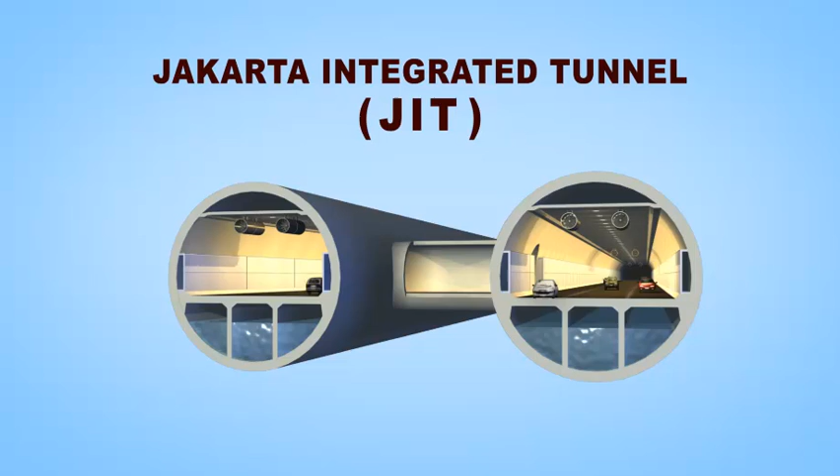Jakarta Integrated Tunnel, a twin or double-barrel tunneling system, presented by PT Antaredja Mulia Jaya and supported by the Ministry of Public Works and Housing in cooperation with the provincial government of DKI Jakarta.

Jakarta is the capital city of the Republic of Indonesia with a population of around 10.2 million people in 2011. But the Jakarta metropolitan area, or Jabotabek, has around 28 million people, which is the biggest in Southeast Asia or the second biggest population in the world.

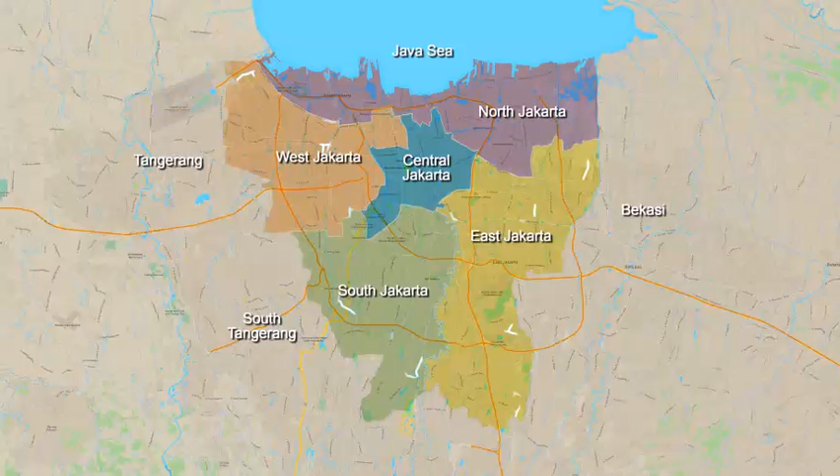Jakarta has only 7,660 kilometers length of roads, covering road areas of around 4,000 hectares. The ratio of roads in Jakarta is only around 6% of the city area. The total amount of motor vehicles in Jakarta was around 9.6 million in August 2014.

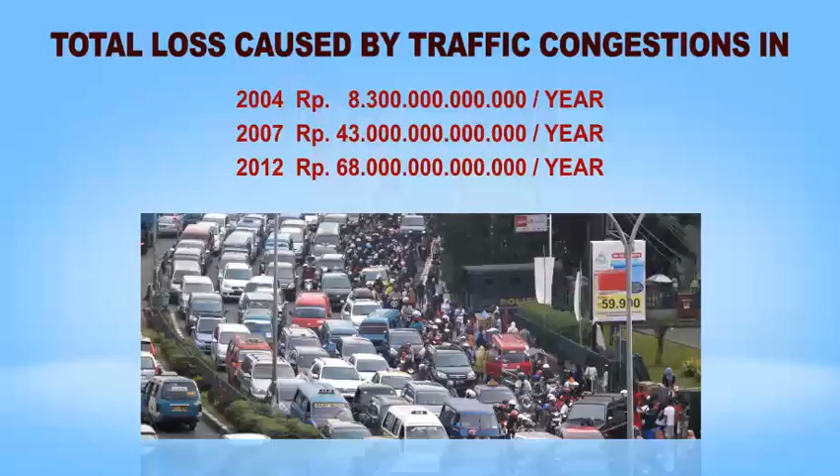These motor vehicles are always increasing rapidly year by year and cause severe traffic congestion in almost the entire city area. The classical problems of Jakarta city are traffic congestion and flooding.

The basic concept of flooding management in Jakarta was given by Professor Herman van Breen in 1918, when Jakarta was called Batavia under the Dutch colony. In this concept, Batavia city was entrenched by a flooding channel. In principle, this concept is to limit or restrict rainfall water coming to the city from the upstream area by building a half-circular flooding channel.

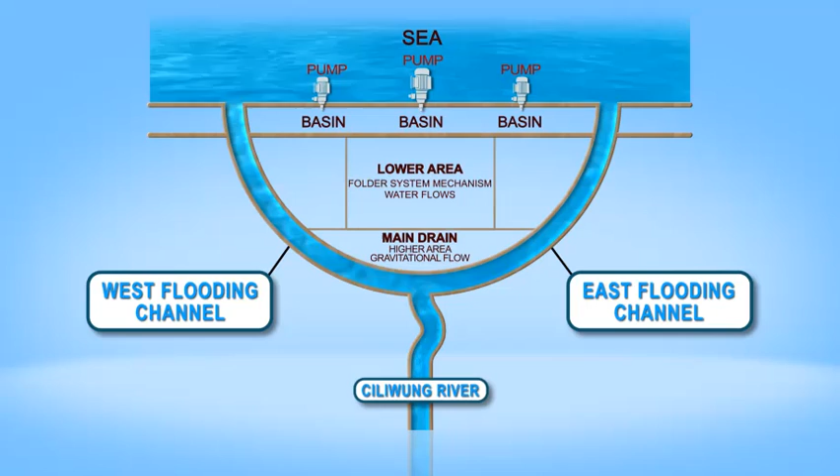Whereas since the volume of rainfall in the city has become less, it can be managed by building several drainage channels inside the city. The Dutch built half of the flooding channel to cover surface water flow from the southwest bound area of the city. This channel is well known as Kanal Banjir Barat, or West Flooding Channel.

Just a few years ago, the provincial government of DKI Jakarta completed this flooding channel by building the other half of the channel in the east direction, that is the East Flooding Channel. However, now a new problem has arisen. The old Batavia has changed and become a bigger city called Jakarta. The flooding channel is not bounding around the city anymore, but is now located in the middle of the city. Therefore, a new model of flooding mitigation is urgently needed at the southbound of this flooding channel.

The best answer to all of those problems is the Jakarta Integrated Tunnel, or JIT. JIT is a solution to traffic congestion and flooding problems, and at the same time, it can give a solution to the lack of electricity and standard clean water supplies of the city as well.

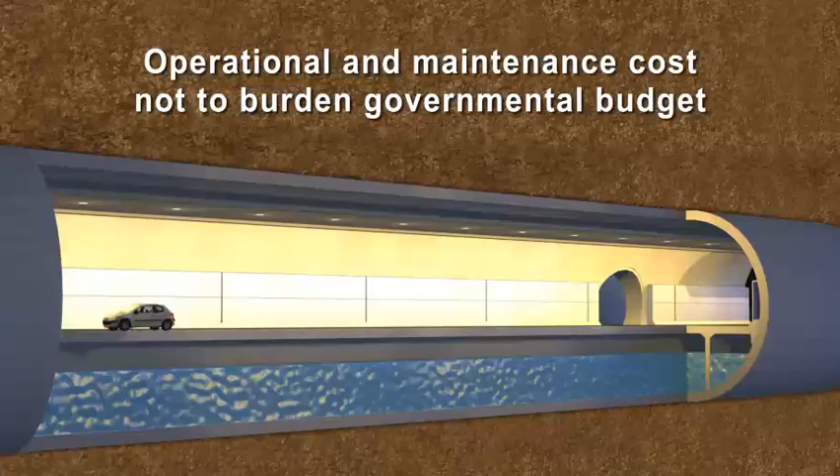Actually, it is an obligation of all governments in the world to build and finance a flood controlling system facility, because not even a single private company will step into such a zero return project. In order to overcome this constraint, in the Jakarta Integrated Tunnel concept the flood controlling system is integrated into a toll road system. So, the JIT system relatively will not burden the government budget, especially in operation and maintenance of the project.

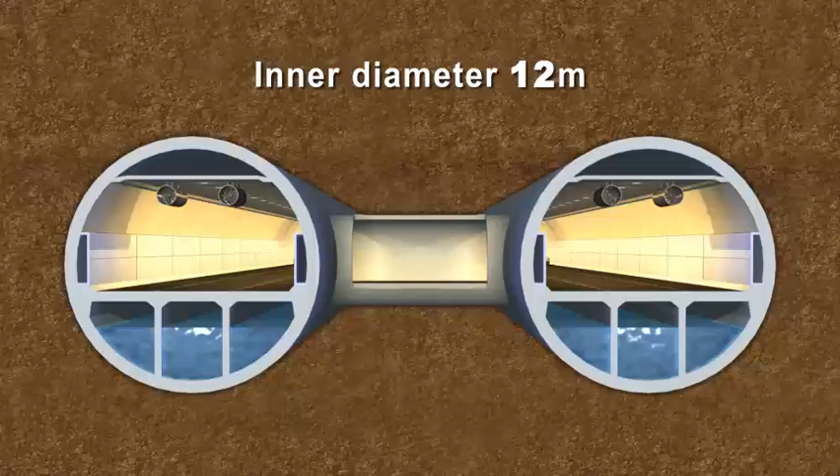The Jakarta Integrated Tunnel System is a twin tunnel or double-barrel system of 12 meters inner diameter each. There are 3 lanes of toll roads in each tunnel. In the JIT system, the functions of flood controlling and toll road are totally separated. There is no need to build a water gate inside the tunnel to separate and alternate these two functions, wet and dry conditions, as needed in the single tunnel system. Therefore, there is no risk of water flooding the toll road at all.

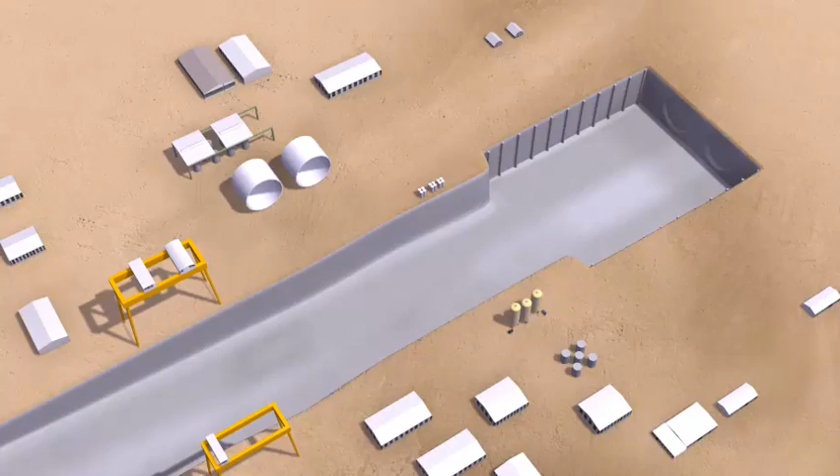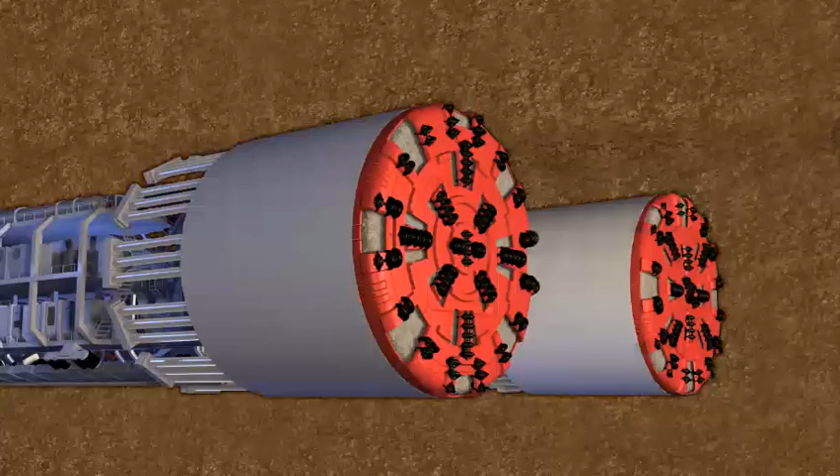Since there is no land acquisition needed, or only limited at both ends of the tunnel, tunnel construction can be done in a very fast and safe way using a tunnel boring machine, or TBM. While the machine is moving ahead, it is followed by installing precast concrete segments to form the tunnel linings or tunnel walls.

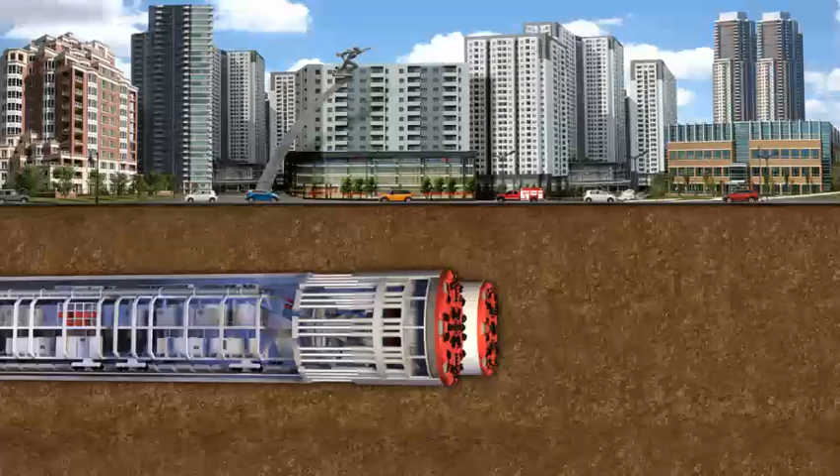The route of Jakarta Integrated Tunnel is chosen under an existing road or under an existing railroad. By doing this, it can assure to avoid long and deep pile foundation of buildings and to get a good compact subgrade formation. During construction stage of TBM, there is no or only limited disturbance to the existing activities on the surface.

So, if water is being poured into one vessel of an interconnected vessel, then the water will flow through the tube into another vessel until the height of the water level in both vessels becomes horizontally even. Water flow inside the tunnel is ruled by a gravitational law, and therefore, there is no need to use a pump, except for the purpose to re-empty the vessels.

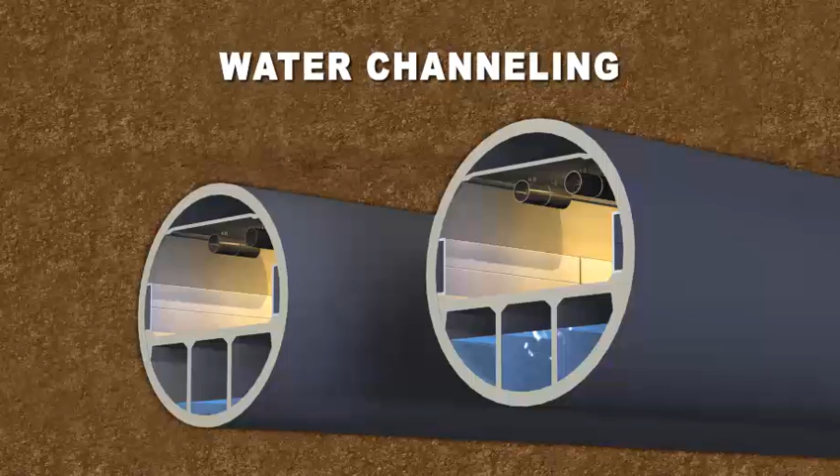Maintenance of wet area of lower channel can be done one by one alternately among each tube of the twin tunnels. When one tube is being emptied, then the other tube is still keeping on functioning in channeling water. With the continuous functioning of water channeling, the JIT system can also be utilized to build a micro hydroelectrical power system and as a water channel to cater for standard clean water supply to the city.

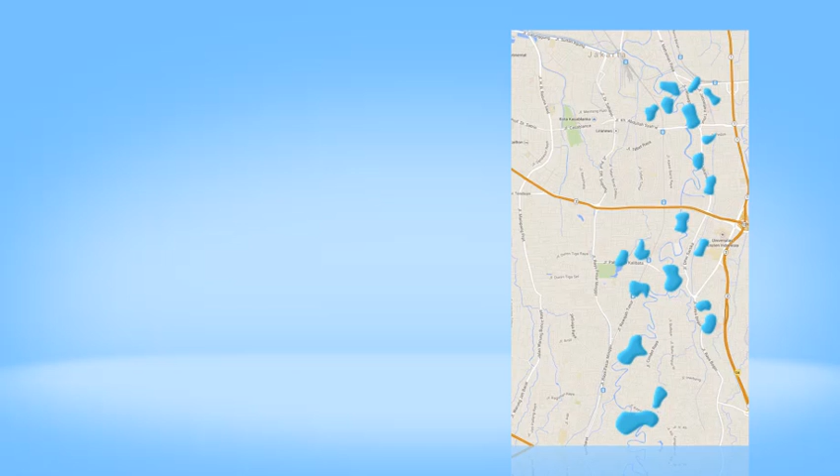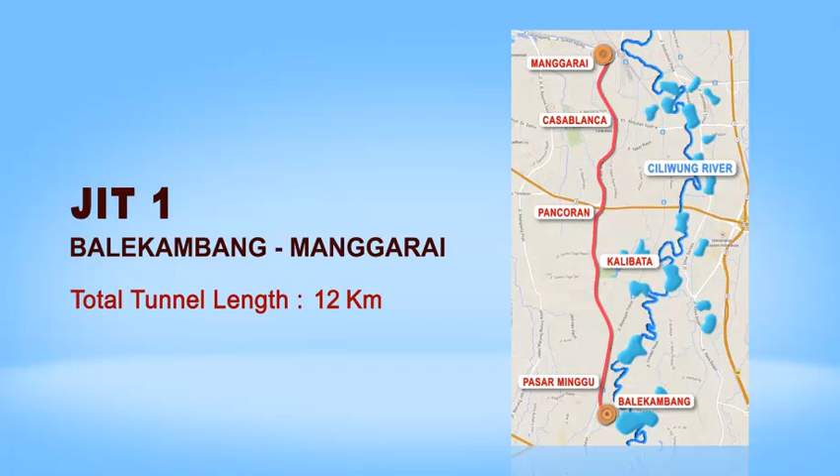At the first stage, Jakarta Integrated Tunnel will build JIT-1, Balekambang-Manggarai Corridor, with a total length of 12 kilometers. This tunnel is to mitigate flooding caused by overflow of Ciliwung River and to reduce traffic congestion at southbound to city center corridor through Pasar Minggu Casablanca toll road section of 9.60 kilometers length.

This tunnel is stretched under the ground just right below the existing road, which starts from Pasar Minggu at Pasar Minggu Street and goes to Pancoran Junction, Dr. Supomo, and Dr. Saharjo Streets at Tebet area, up to the end in Manggarai at West Flooding Channel.

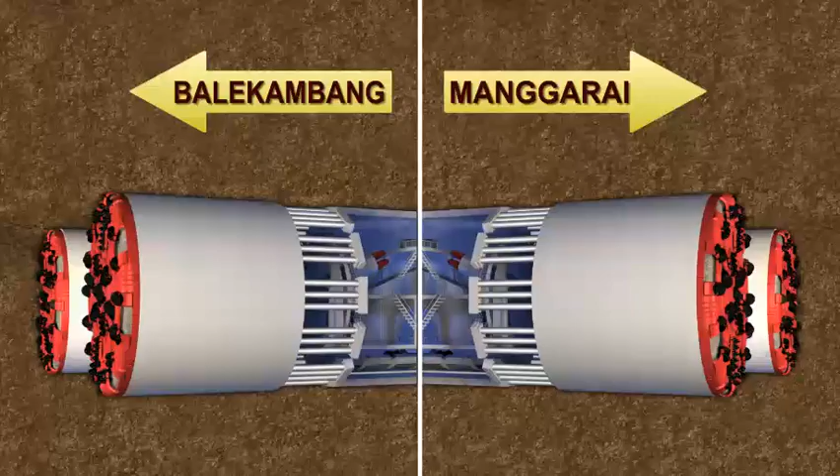After completion of construction JIT-1 Balekambang, Manggarai, the problem of flooding caused by overflow of Ciliwung river, such as at the areas of Balekambang, Kampung Pulo, Kampung Melayu, Kalibata, Bukit Duri, Otista, Dewi Sartika, and Jatinegara will be overcome.

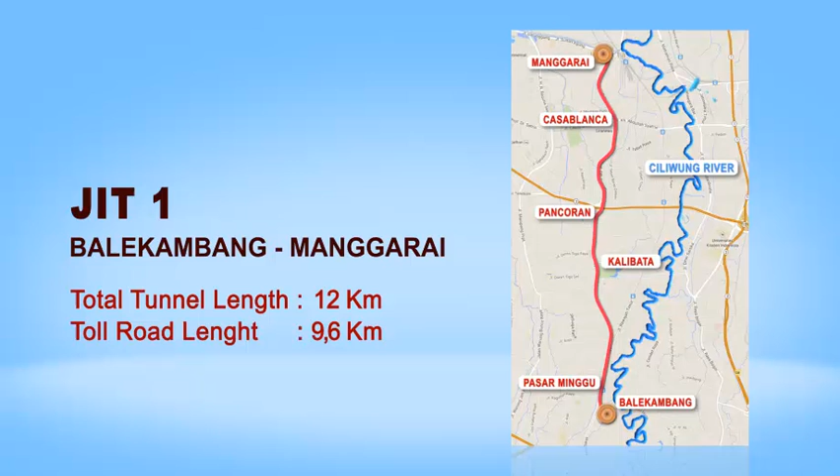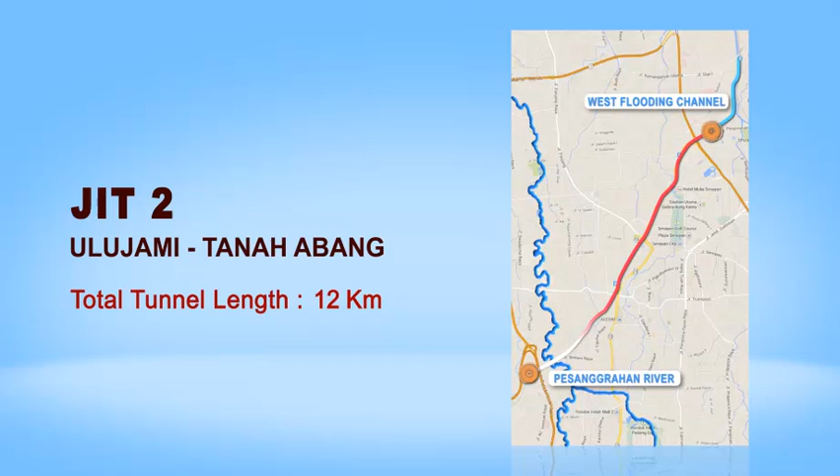At the first stage, 2 of the 6 sections of toll roads in Jakarta City will become 2 main JIT sections. Firstly, toll road section number 6, Pasar Minggu Casablanca as JIT-1, and secondly, toll road section number 4, Ulujami Tanah Abang as JIT-2.

In the next stage, it is strongly recommended that all of these toll roads will become JIT tunnels in order to complete the basic concept of flooding management in Jakarta, which has been introduced by Professor Herman van Breen, so that all other local flooding spots can also be overcome by these huge JIT drainage channels.

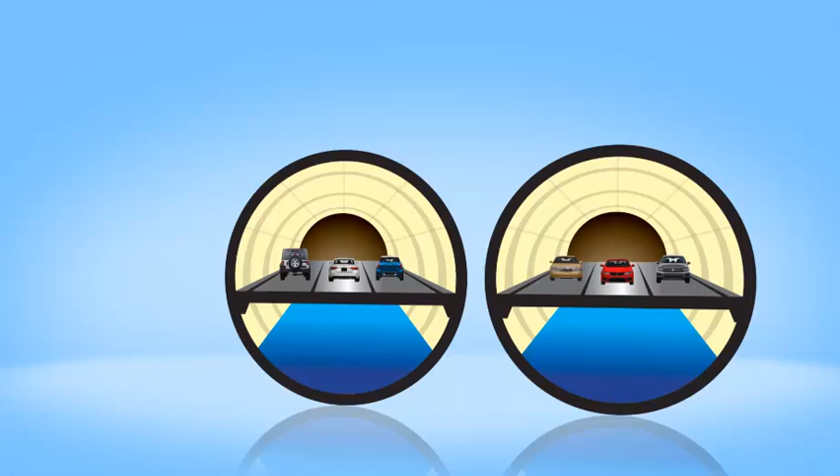The Jakarta Integrated Tunnel or JIT is a giant leap and gateway towards a better and a new Jakarta. But of course, it is not only applicable to Jakarta. It will also become a solution to all metropolitan cities all over the world. So, JIT is just in time.